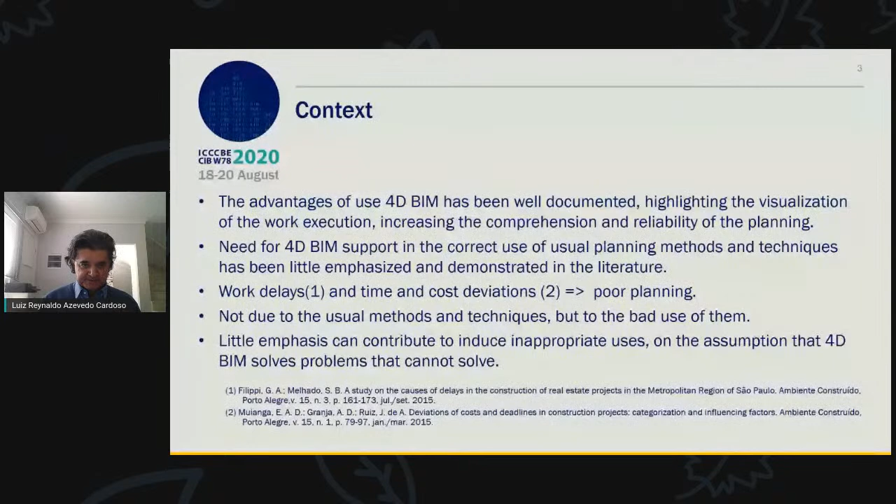Objectives. Propose and demonstrate the viability of a method to use 4D BIM to support strategic construction planning decisions. Methods: literature review, conceptual considerations, and the presentation of a case study. Literature review: databases Web of Science and Scopus, sample to analyze the content, 22 articles.

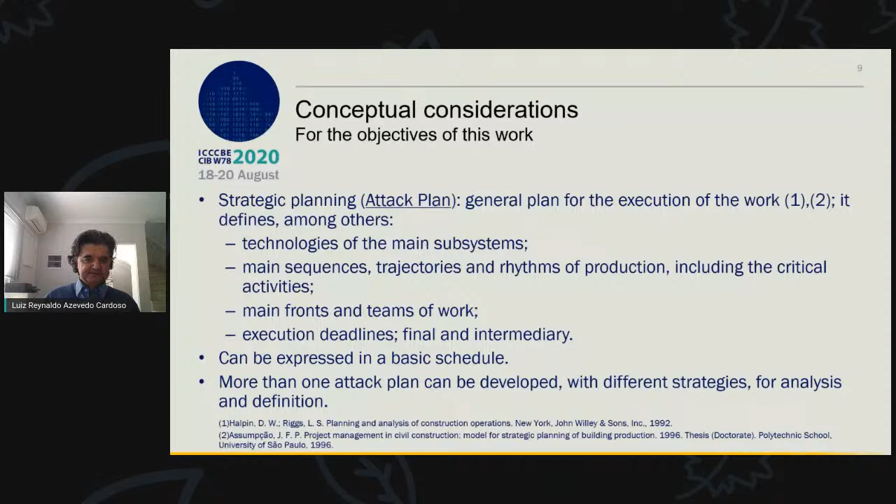Strategic planning is general planning for the execution of the work. It can be expressed in a basic schedule. More than one attack plan can be developed for analysis and definition. The planning techniques considered are Gantt chart, PERT/CPM, precedence networks, and line of balance.

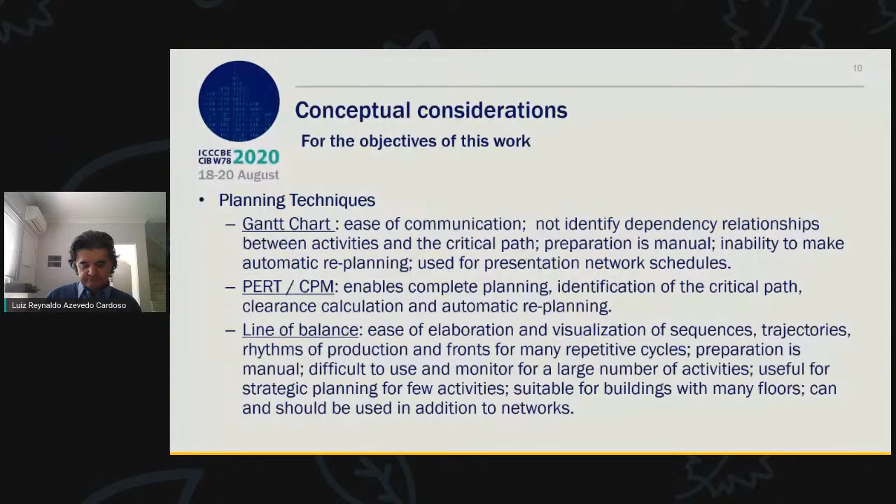The planning techniques have been able to support planning needs. Its main limitation is the difficulty of interpreting the schedules. 4D BIM allows visualization of the building construction. 4D BIM doesn't replace the usual techniques; it should be connected with them. It is necessary modeling from the 2D CAD and complementary elements and equipment. In the strategic planning, it's possible to model only critical sequence with simplified modeling, and the planner can do it.

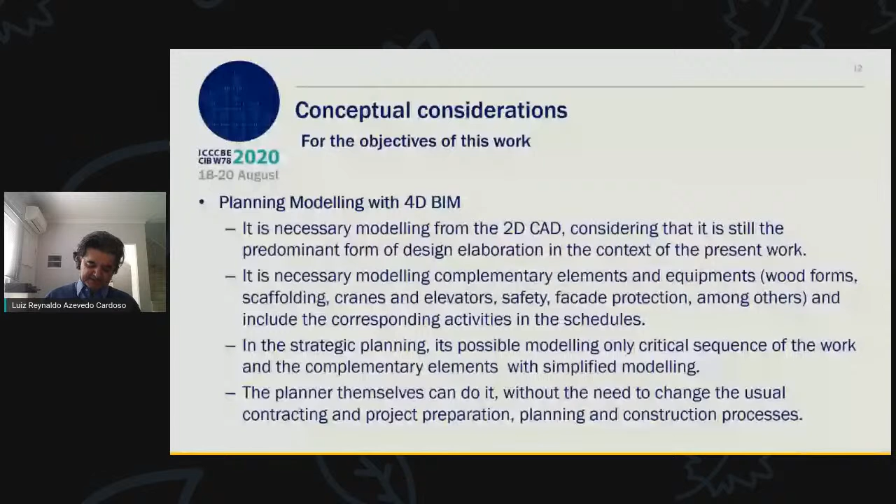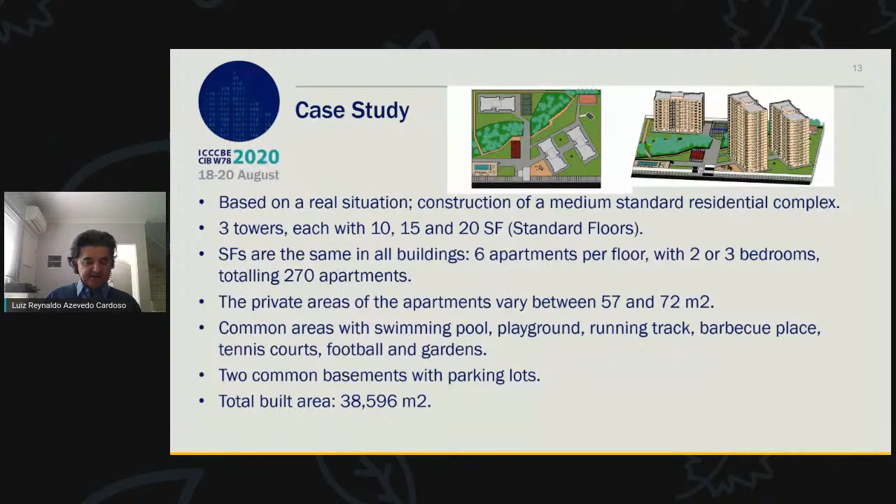Case study: construction of a medium standard residential complex, 3 towers with 10, 15, and 20 standard floors, 270 apartments, built area about 39,000 square meters. The 3 towers will be built simultaneously with a gap of 30 days. The question is, which tower to start with, the biggest or the smallest? Proposal: simulating the two alternatives in 4D BIM.

Modeling from 2D CAD in Revit with 3 towers, external ground, complementary elements. Simulation with Navisworks, with files imported from Revit and the schedules made in Project. Images of the visualizations. On the left, initial works. In the middle, plan 1, start by the largest. Plan 2, start by the smallest. And on the right, the complete work.

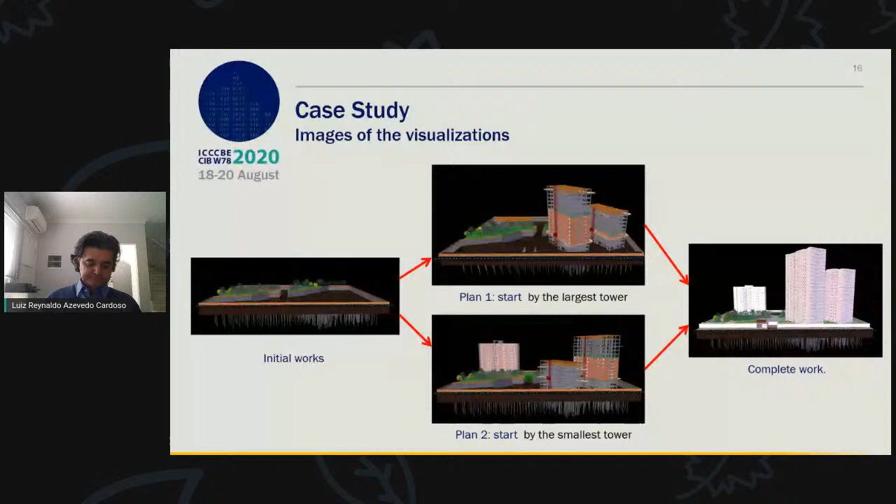Results and discussions. Plan 1, 22 months. Plan 2, 24 months. Visualization presents good general quality, providing decision support. The main difficulty is the modeling time, also reported in the literature review, increasing from about 150 to 600 activities each plan, all modeled. The total expenditure can be compatible.

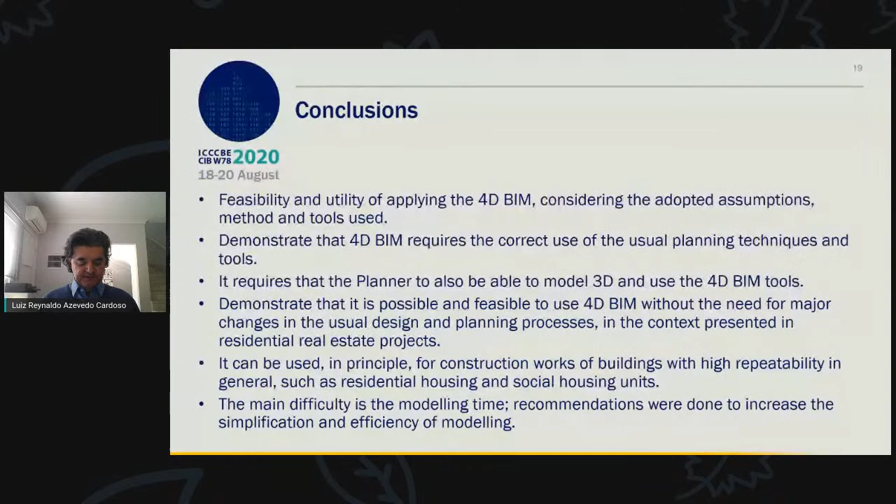Conclusions: feasibility of applying 4D BIM with the methods and tools used. 4D BIM requires the correct use of the usual planning techniques and tools. The planner should also be able to model 3D and use the 4D BIM tools. The main difficulty is the modeling time. Recommendations were made for this.

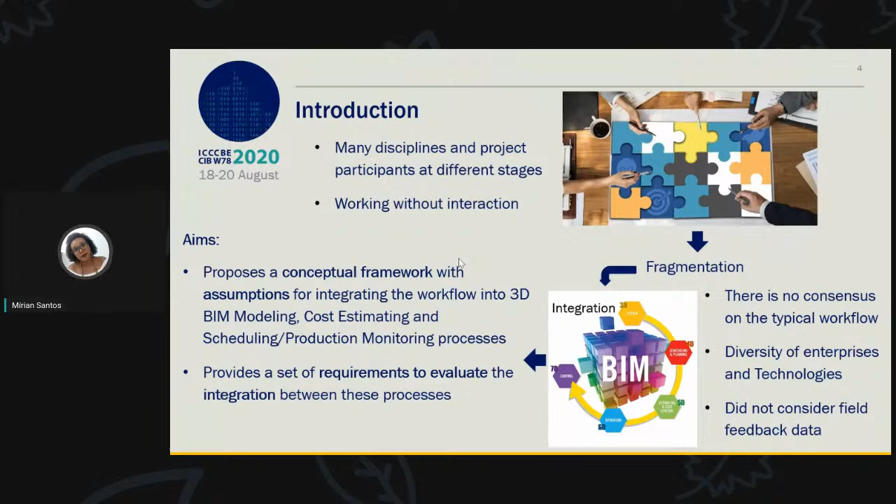Construction projects involve many people who usually work separately in different stages. For this, fragmentation represents a common problem. Many studies have emphasized the benefits of integration using BIM. However, there was no consensus on a typical workflow to integrate different processes in construction. This work proposed a conceptual framework with assumptions for integrating 3D BIM modeling, cost estimating, scheduling, and monitoring process workflow, and also provides some requirements to evaluate the integration between these.

With an integrated workflow, it's possible to share information and activity through people, processes, and technology, resulting in improvement in transparency, communication, collaboration, and coordination.

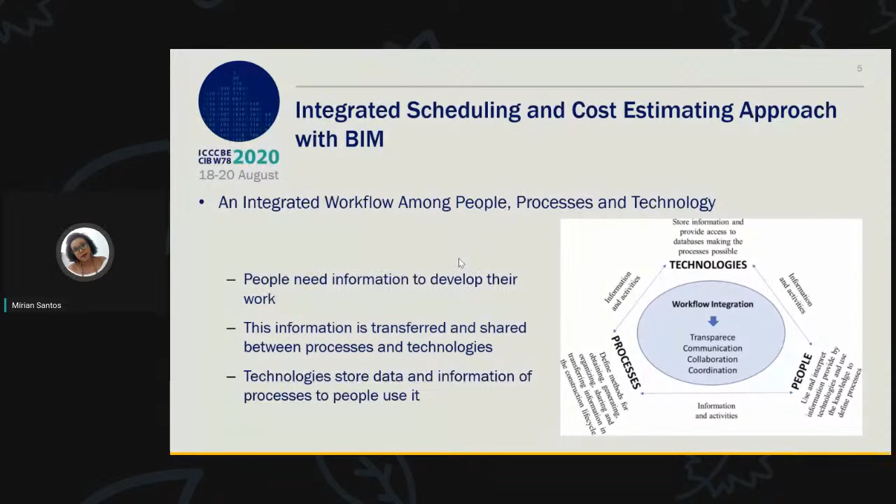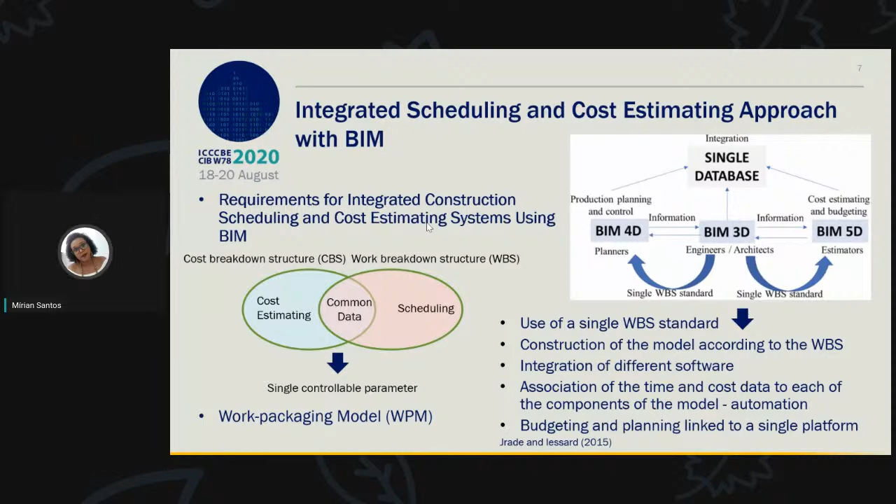Cost estimating and scheduling integration must be through a single controllable parameter, since they share some common data, as resources and quantities. The work packaging model facilitates the integration once it uses cost and scheduling in a single parameter, the WBS. Other requirements to foster integration with BIM are: develop 3D modeling according to WBS, integrate different software, link time and cost data to model components, always focus on automation, and use a single platform to link cost and planning information.

A case study took place in 2 projects. The company used the software Revit, Navisworks, Project, TOTVS, Excel, and CP Obras, a customized software. The study aimed to answer the following question: How is the workflow between BIM modeling, scheduling, cost estimating, and monitoring processes? What problems commonly hinder integration? There is also a literature review to understand how to improve and evaluate the effect of integration.

The main activities in project 1 were modeling, planning, cost estimate. The team received the 2D project in the office. The long-term plan is sent to field staff. Mid and short-term planning is integrated into monitoring software, and the real data is sent to the monthly report.

The difference from project 1 to project 2 was the use of a quantity take-off of BIM, and the sum adjustment and activity sequence uses some field data. But in project 2, there was no long-term planning and a defined work package.

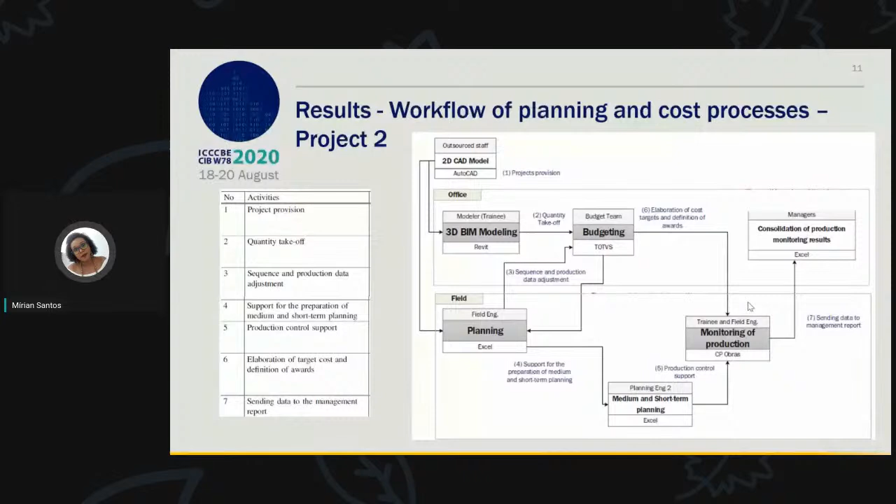The most common problems were: planning centralized in the office, lack of a work package based on field activity, no use of a single WBS standard, and a need for a single platform or tool to integrate all processes. Also, there is no integration with BIM modelers to develop a useful model, and the real costs and planning data were not integrated with BIM.

In the conceptual framework, the integration of processes must be one by one, encompassing people and technology. Then, the integration could be accomplished fully. In 3D BIM model cost estimate integration, one has to consider the number of 3D BIM elements and how the estimation program captures and uses this data. For schedule-monitor integration, you have to pay attention to how the work package will be organized and how production data will be collected in the field. In this way, feedback will be more agile.

In 3D BIM modeling, scheduling, monitor integration, you have to try to connect as closely as possible the BIM elements with the work package. Then it will be possible to use 4D simulation. For cost estimating, scheduling, monitor integration, it's necessary to take into account the work package and how cost data can impact the schedule and vice versa. In this way, it's more effective to control costs and deadlines.

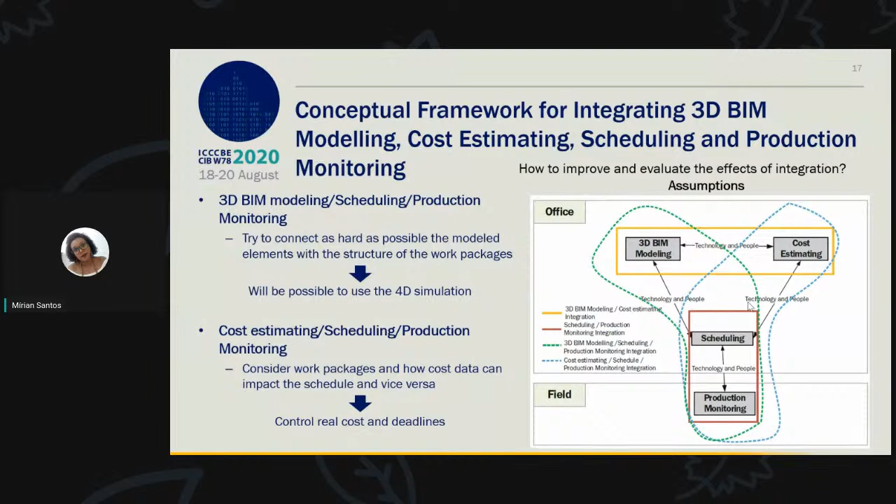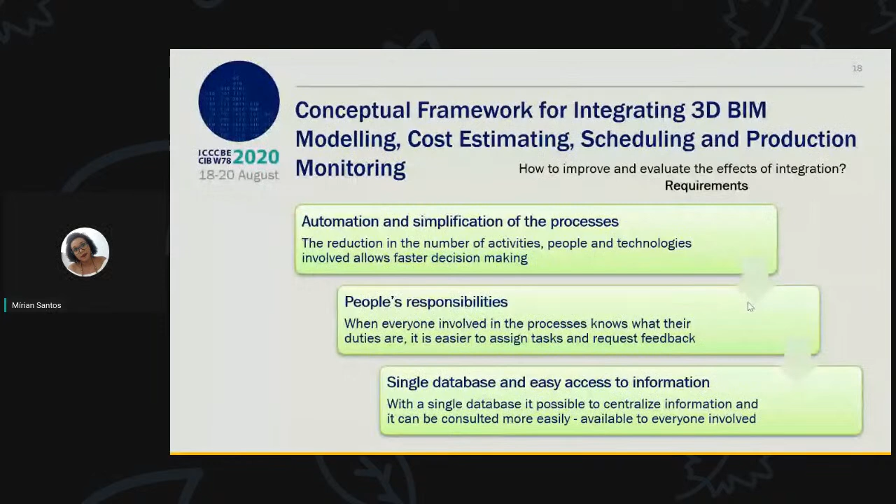Some requirements for integration are automation and simplification, necessary to reduce the number of activities, people, and technology involved. If you know people's responsibilities, it's easy to assign tasks and request quick feedback. A single database to centralize information and make it available to everyone is a great idea. Making sure there is communication between office and field teams, interoperability is important too, as well as reviewing and updating cost and schedule data.

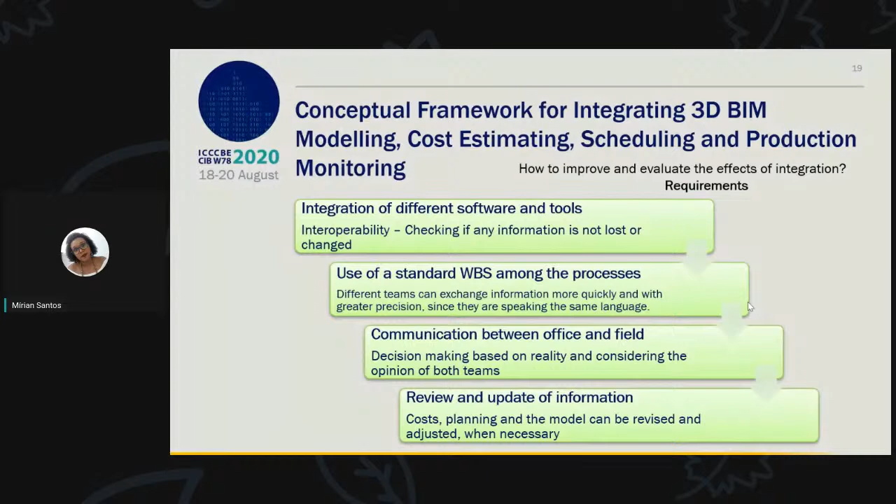Finally, based on the conceptual framework and the requirements, construction companies can carry out a diagnosis of integration, as well as evaluate if there are any improvements after implementing integration. Thank you all for your attention.

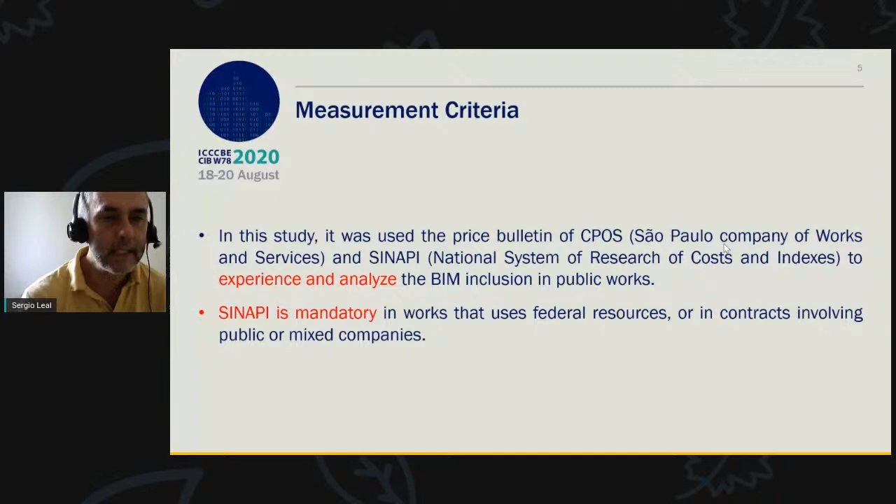It was found that simplification is highly desirable in propositions for the user with BIM. For example, SINAPI has 32 types of rough cast. This is a huge number, and this variability occurs due to the need of an application place definition in this criteria, which leads to variation in productivity, in remuneration, and in changes in application tools, and so on.

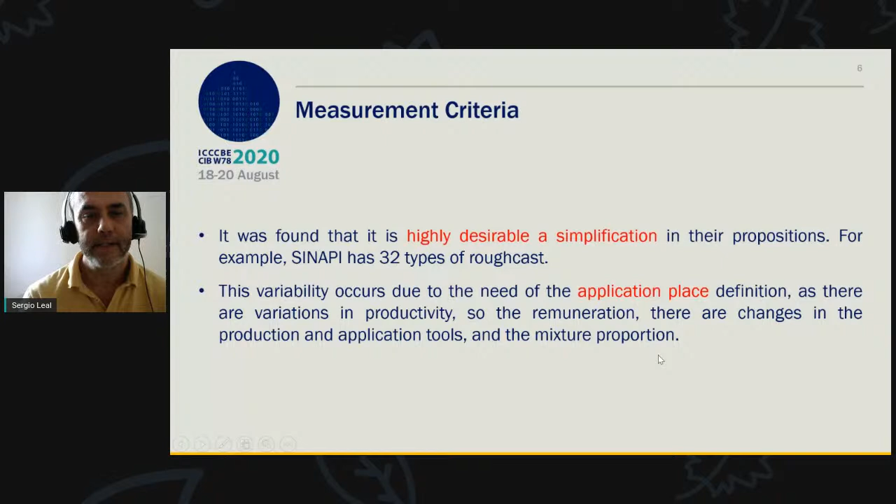Too many variables created great difficulty in BIM classification processes, and very small flexibility for the builder to make his propositions. Then we noted that if we only change a little bit the net of possible classifications.

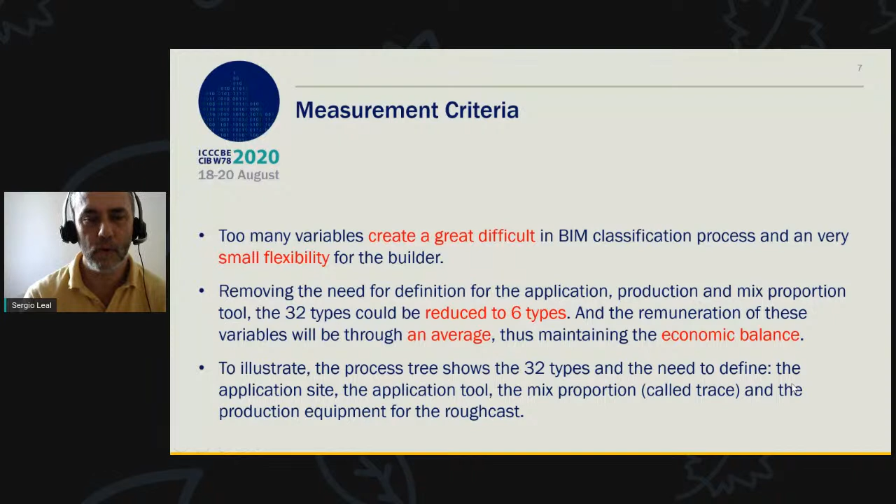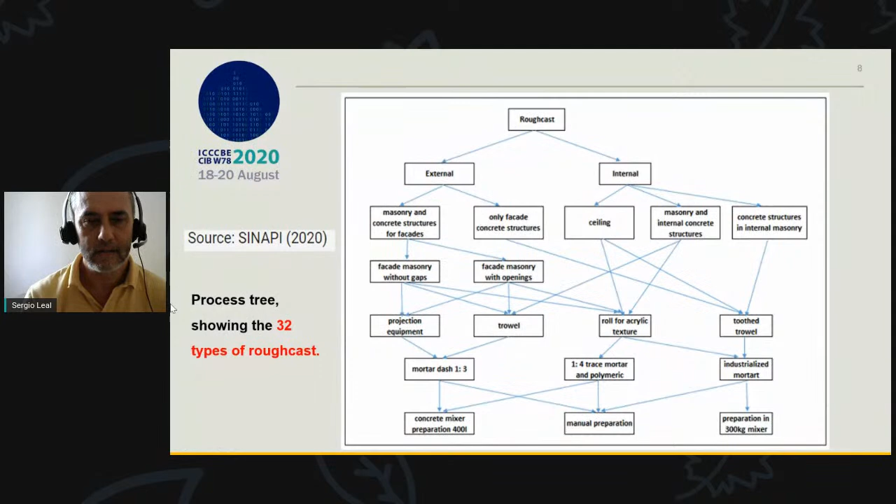Take rough cast, for example - this is the net, the process tree of the definitions of rough cast. If we take off the need for the definition of the place in the rough cast, we drop from 32 to 6 types of rough cast definition and classification. This is quite good, and quite necessary to do a job effectively, with productivity, in this kind of public work.

Here is the definition of the composition of these kinds of services in the public works here in Brazil, in SINAPI, and in this case the SINAPI proposition.

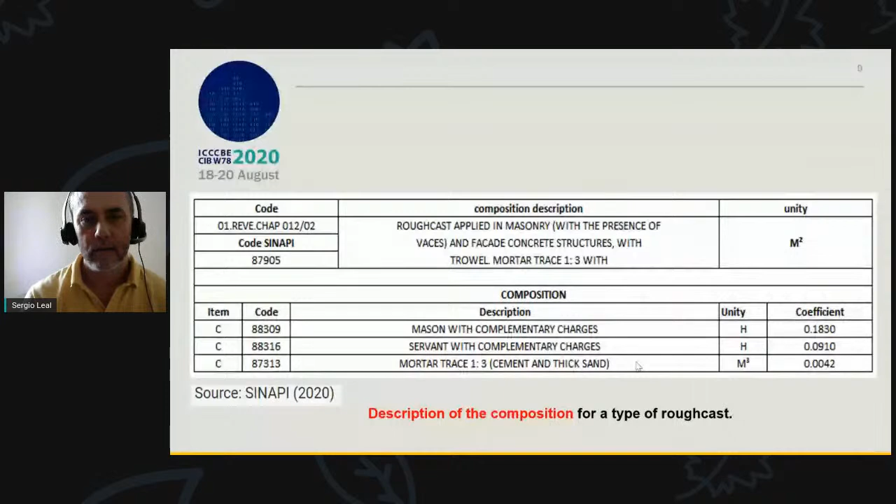This research was conducted with a design science research method that proposes to build a prescriptive artifact and to solve a real problem. Then we modeled an actual penitentiary project at the São Paulo State.

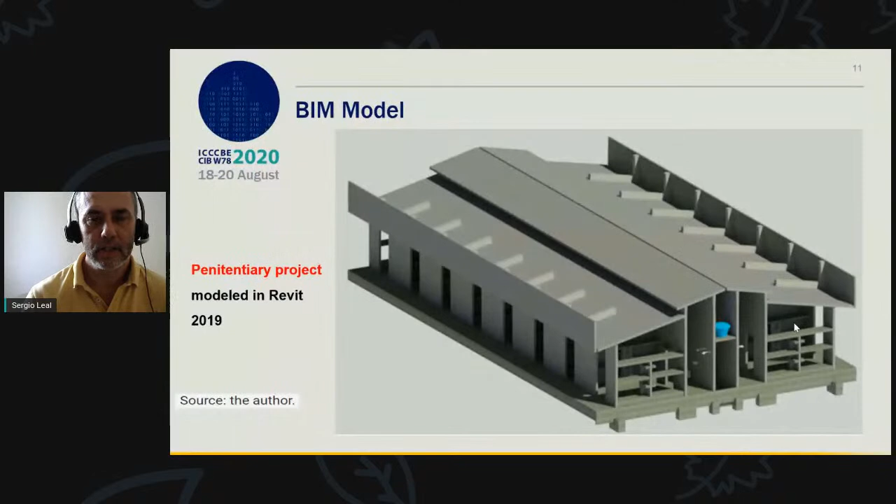This model was elaborated from the CAD to the information model, and is under construction now. This means the actual costs and service quantities will be used for the model consistency verification afterwards. This is a kind of construction that is very modular - here is the figure to illustrate the model. It's very modular and was applied in other constructions, so we have so much information about the execution of this kind of work.

A Revit classification manager was used, and we noted a limitation in the classification of composite objects. For example, with layers it's not possible to classify them separately, so we sought an alternative to overcome these difficulties.

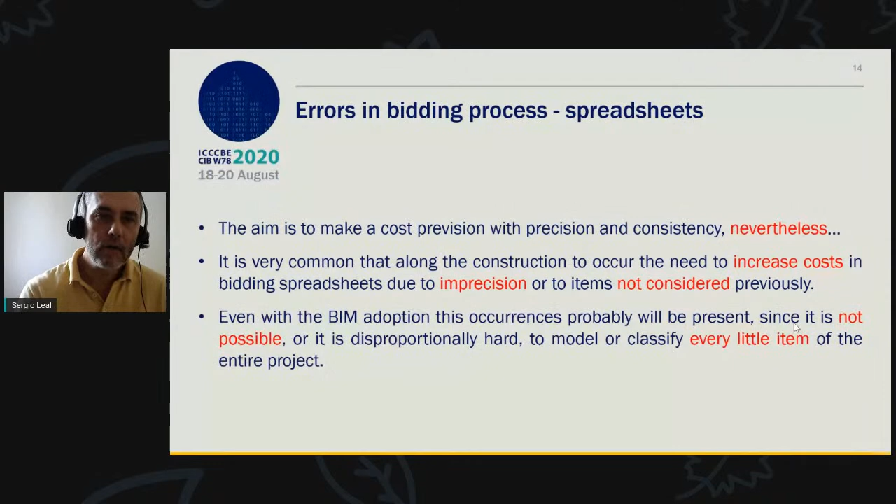The aim, at least, is to achieve the most precision and consistency in cost provision, but nevertheless it's very common along the construction for increases to occur, due to a number of issues. But in Brazil, there is no standard for inconsistency classification.

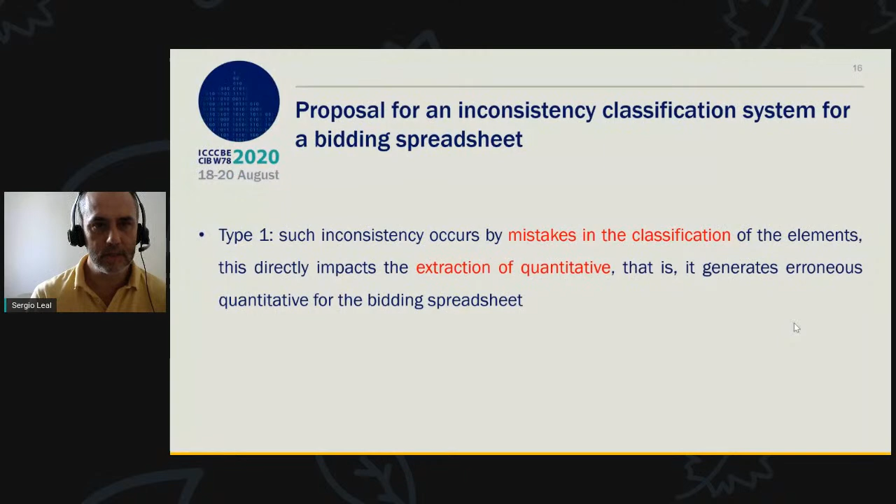It is an error - it was an error. It exists as an error classification, but we, as a byproduct of this research, intend to propose a classification of these inconsistencies, resumed in 4 types. Here is type 1 - I don't have time to explain, but type 2 is the lack of interpretation, which leads to an inclusion of additional services, causing what we call double remuneration.

Type 3 is an inconsistency that occurs through a global analysis of the bidding, where we cross some information and conclude that it generates a need for a non-applicable execution process.

And type 4 is due to a lack of further information. The budgeter has the description of the services, and when the description is not quite good, he tends to choose the minor price, and this is not really good.

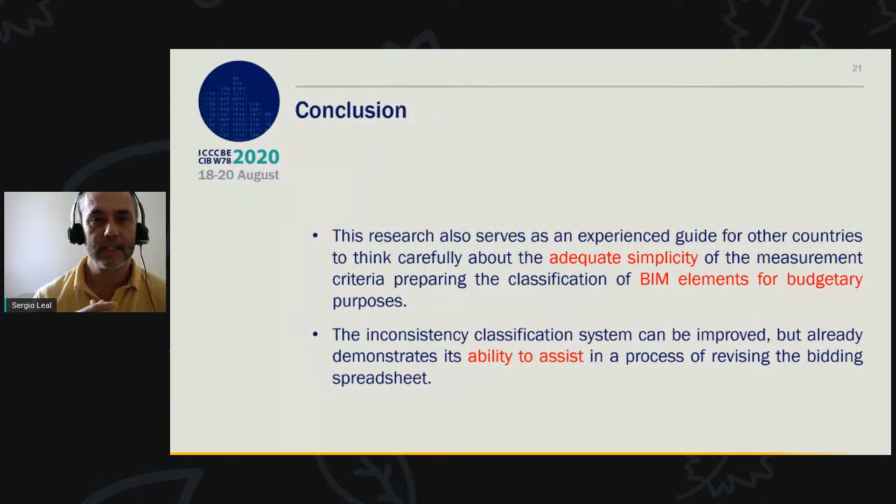We observed the possible advantages of simplifications in lots of services, and this research also shows that we can give you an experience guide of adequate simplicity and the classification of elements for budgetary purposes in public works, and the ability of analyzing the bidding spreadsheet with these classifications. Thank you very much, and sorry for the rush.

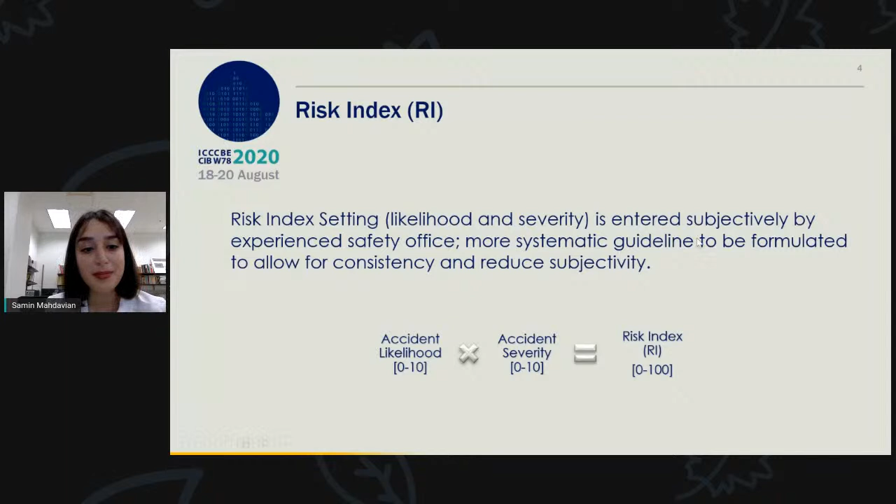The risk index is the multiplication of accident severity and likelihood. The likelihood and severity vary from 0 to 10, 0 the lowest and 10 the highest. These numbers are entered subjectively by an experienced safety officer. The higher the RI score, the higher the accident risk. You can see the formula on this slide.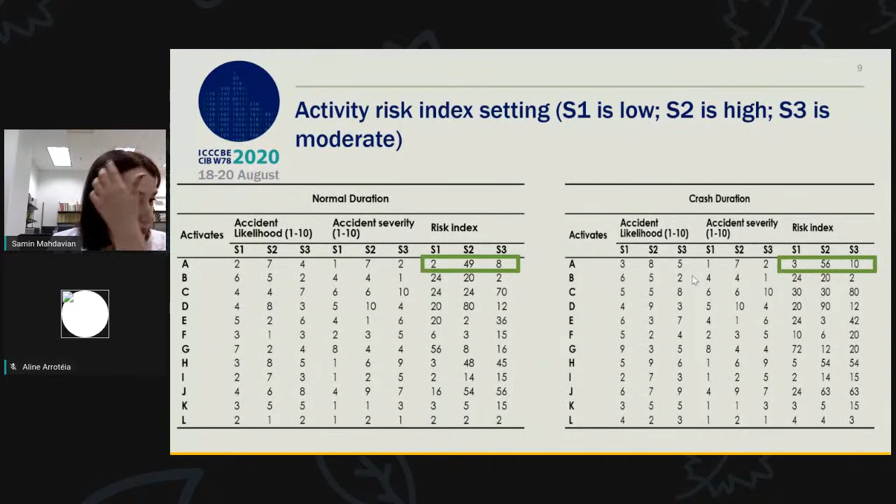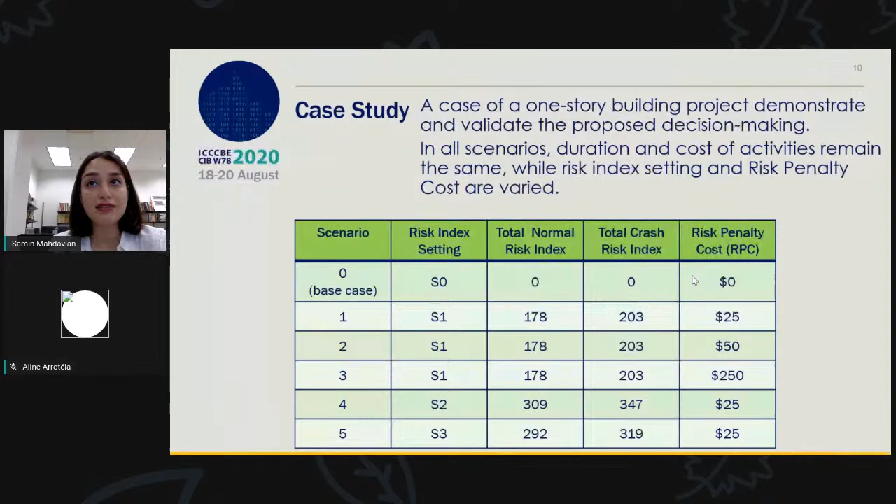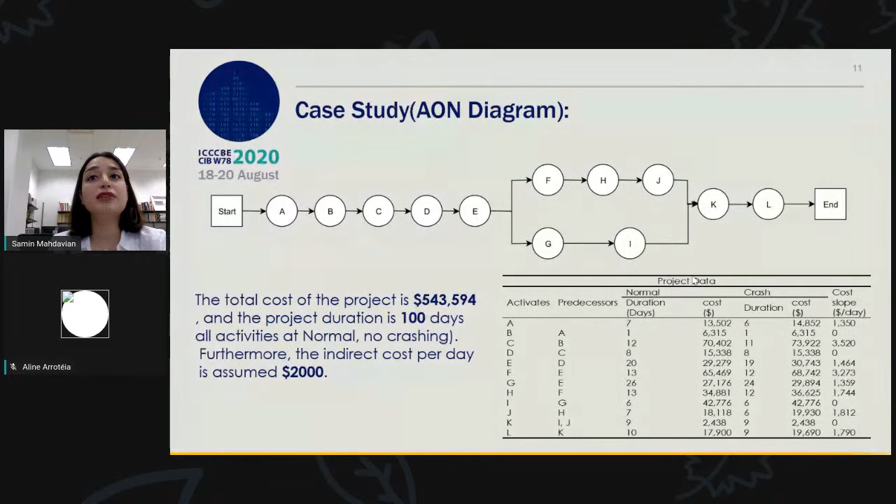A case study of a 1-story building project demonstrates and validates the proposed decision-making. In all scenarios, duration and cost of the activities remain the same, while the risk index setting and risk penalty costs are varied. You can see all 6 scenarios in this table. The AON of the case study is presented in this slide, and the total cost of the project is $543,000, with a project duration of 100 days. All activities are normal in this table, and the indirect cost is $2,000 per day.

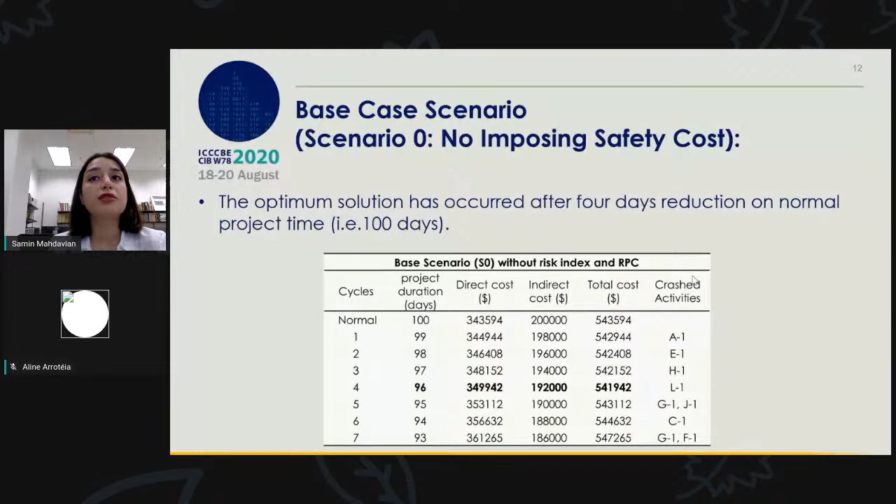The base case scenario is presented in this table with 0 risk index and no imposing safety cost. The normal project time, as mentioned before, is 100 days, and the optimum solution has occurred after a 4-day reduction. It means the optimum solution is for 96 days.

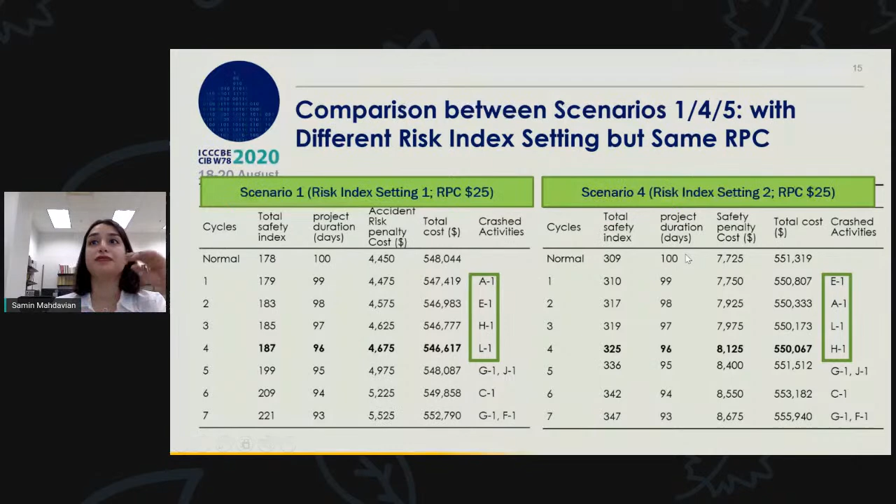Comparing the results of scenarios with different risk indexes and same RPC, which was $25 if you saw it, shows that sequence of crash activity has changed, but the total project time and cost has remained the same and it is not affected. You can see all the scenarios with the risk index and with the RPC together in this slide. And I want to show that the risk indexes affect the selection of crash activities and the final optimum solution of TCT.

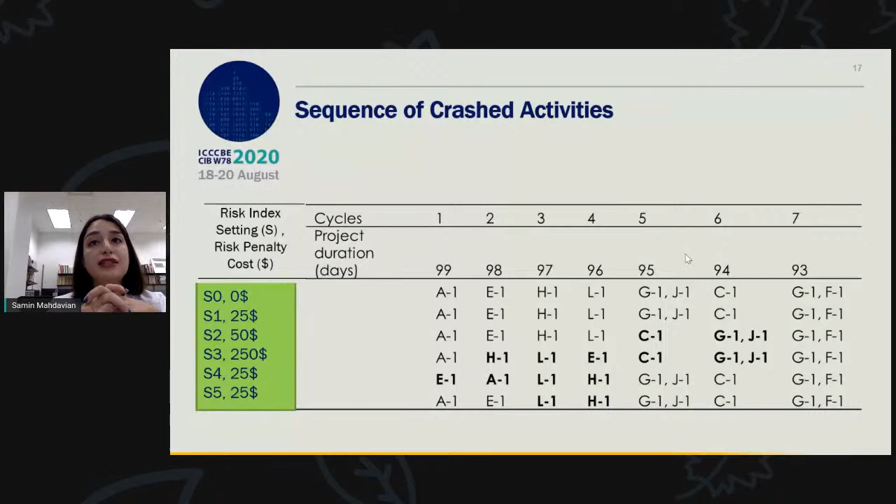There are two conclusions for this study. The first one is adding risk to TCT would impact the optimization outcome and sequence of crash activities. And the second one is with a proper risk assessment scheme and a proper risk penalty cost setting, accident risk can be incorporated into the TCT optimization.

And there are three limitations for this study. The first one is risk index setting is entered subjectively by safety officer and it is not formulated. RPC setting is based on trial and error, no formal approach. And the third one is the optimization must be formulated, solved specifically for each particular project.

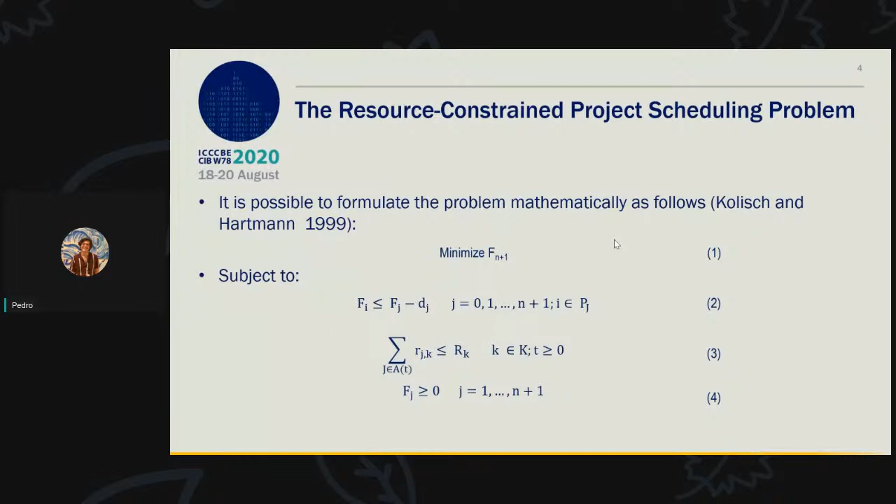The genetic algorithms are a class of procedures inspired by the genetic evolutionary process, and it uses three main operators. The crossover operators are used to mix the genetic information of the individuals, the mutation operator acts as a way to increase diversity in the populations, and the selection operator controls the population's reproduction by selecting the fittest individuals.

The proposed approach is presented in three parts. The first is the problem modeling, where the following assumptions for programming are defined. The activities of the project are represented by an activity on node graph and are linked by finish-start relationships. All known information about the project is deterministic. Only one mode of execution is considered.

All activities of the project are considered repetitive. The production rate of the project is considered constant, no preemption is permitted, and there's a resource limitation to be taken into account throughout the whole duration of the project. Can go.

According to the assumptions presented, the logical structure of the type of project addressed is obtained by means of an oriented graph, where the nodes correspond to the activities and the arcs represent the interrelationships between them. However, this representation is not the most appropriate when scheduling repetitive projects.

Therefore, the study implements the method presented by Ishihara, where the oriented graph technique is used to model the relationships between activities of a single housing unit, and then the line of balance method is applied to determine the time of completion of all housing units. Next.

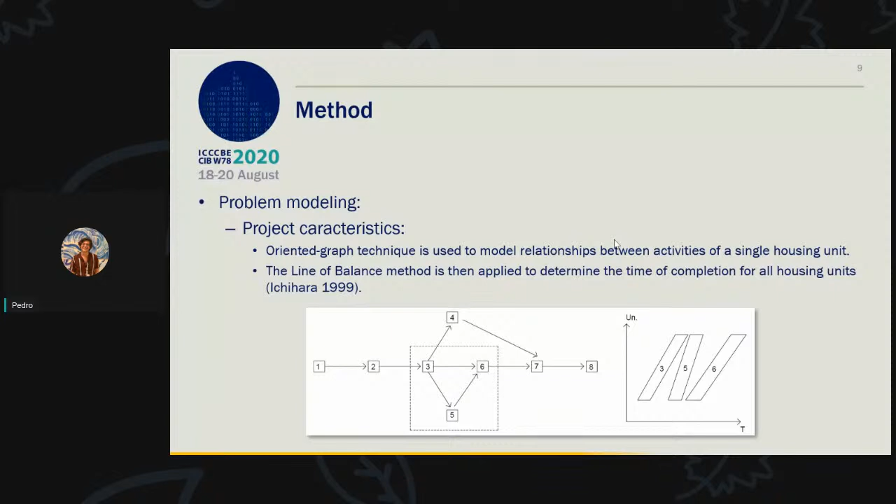The second part of the presented approach is the optimization model, where the genetic algorithm is implemented and its parameters are defined. For the population encoding, the individuals are represented by a list of activities. The assessment of the fitness of individuals is made by an adaptation of the serial method presented by Kolisch and Hartmann, considering the line of balance method. For the selection of individuals, the elitism and tournament operators were chosen. And finally, the one-point operator is used for crossover, and the inversion operator is adopted in the mutation phase.

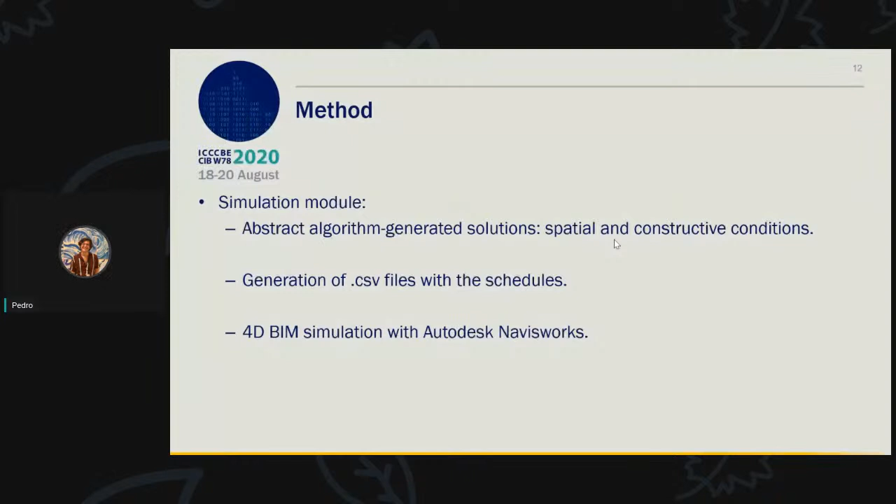The final part of the method proposed is the simulation module. This step is important because solutions determined by the algorithm are abstract and don't take into account spatial and constructive conditions. Therefore, the algorithm-generated schedules are extracted to CSV files, which can be directly imported to Autodesk Navisworks to perform 4D simulations.

To test the efficiency of the algorithm, 45 instances from the PSPLIB were randomly chosen, and 10 rounds of tests were performed for each. It was observed with the experiments that the algorithm is capable of generating better solutions over the generations. However, as the size of the project increases, so does the difficulty of finding good solutions and the required computational time.

3 groups of 3 instances were also chosen to verify the behavior of the algorithm until the last generation, in order to evaluate both its efficiency and the ability to improve solutions. For all of the instances, it was possible to observe the ability of the algorithm to create better solutions, which is mainly due to the choice of the selection by elitism that prevents the best solutions found from being discarded.

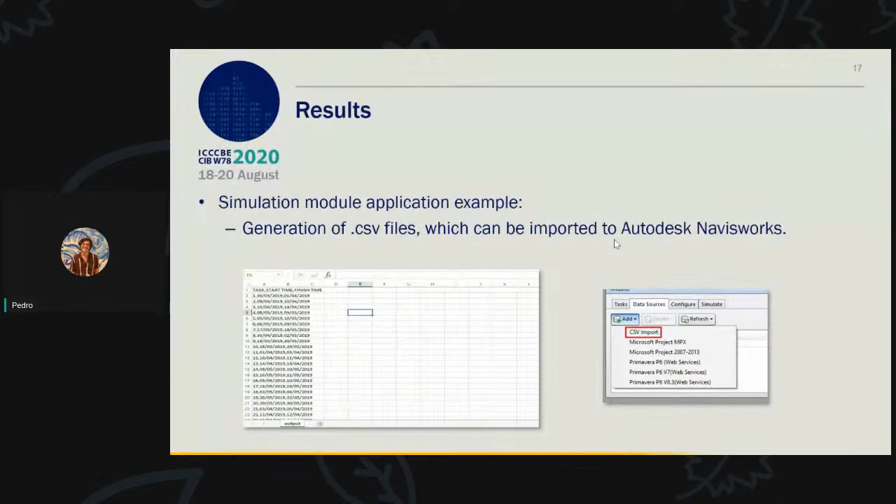And the final simulation could show that the generated schedule respects the precedence relations between the activities and also demonstrates that the line of balance logic was well implemented in the schedule.

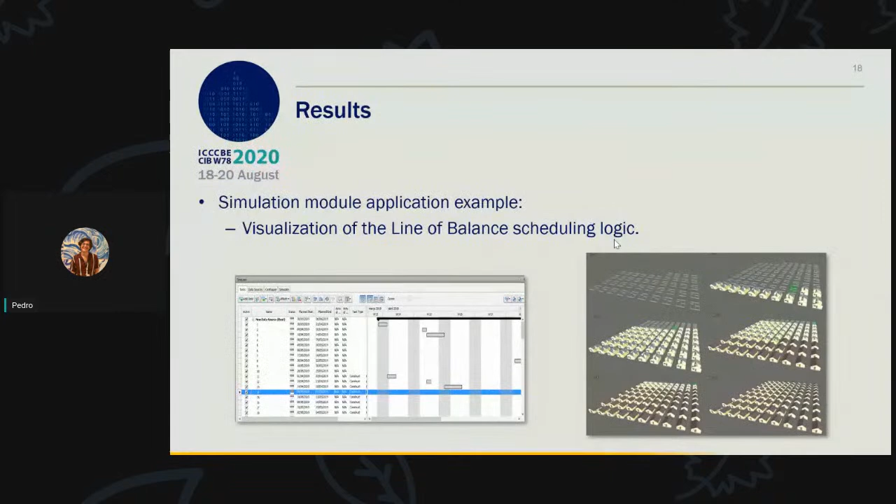Well, in conclusion, the experiments performed showed that the system created is relevant mainly as a way of reducing the human effort when scheduling repetitive projects, since in a few seconds it is possible to obtain a schedule that considers both work continuity and resource limitations. Simulation comes here as another tool to assist in decision making, since several possibilities generated by the algorithm can be tested and even modified through the thousands of functionalities in the BIM-based construction management software. The system can, however, still be improved, since for projects with large numbers of activities, the computational effort required was still very high.

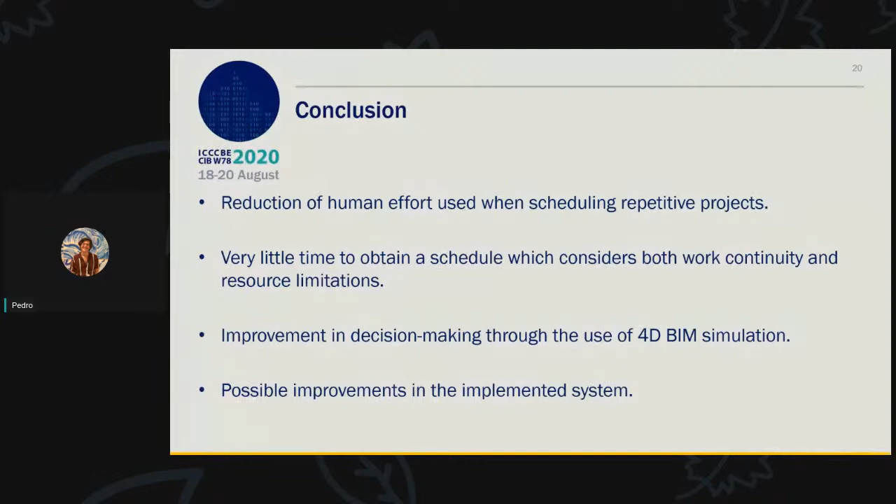Thank you. So with these 5 papers, we start the first question and answer slot. So we have a question, let me see, that is from Christina. Just a moment, I'm fighting the platform. Yeah, this one. This is to Miriam.

Miriam, did the authors test the proposed framework in a case study? Okay. We used the conceptual framework to devise a method to integrate 3D BIM modeling, cost estimating, scheduling, and also monitoring in a case study. It was a product of my master's degree. In this case study, we practiced two assumptions: the 3D BIM modeling and cost estimate integration, and the scheduling and monitoring integration. And there are improvements in implementation and mostly the definition of the work package, resulting in fewer changes in the field.

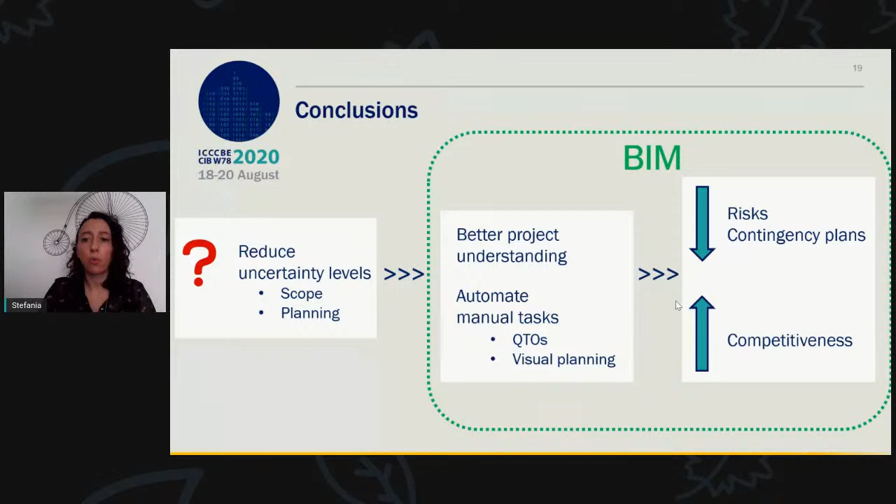During tendering activities, the use of BIM can help reduce uncertainties regarding the project scope and its planning by giving participants a better understanding of the process and automating manual tasks like quantity takeoffs, and promoting a more visual planning process. By consequence, risks and contingency plans are reduced, and the bid, therefore, is more competitive.

The main obstacles to BIM adoption during tendering phases include interoperability issues and a lack of standards. Culture should not be ignored once responsibility has to be shared between team members and stakeholders. Developing research on BIM adoption during the bidding stages is also encouraged to reduce this gap, especially on infrastructure projects.

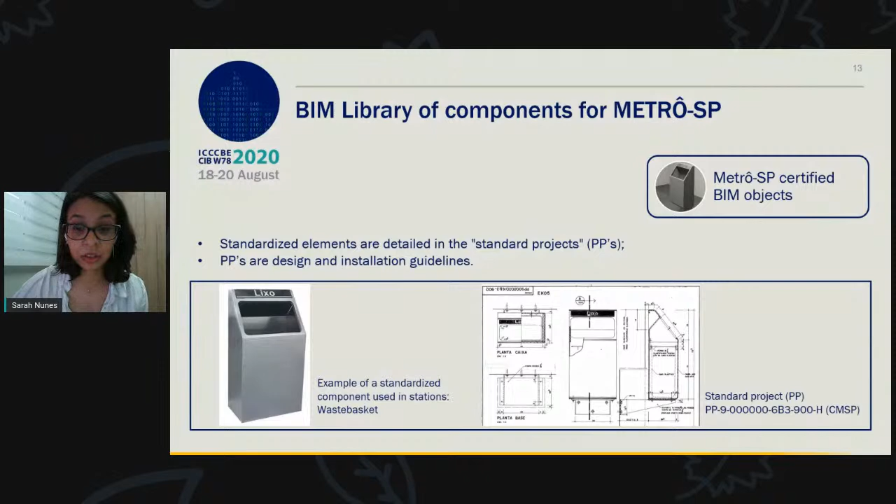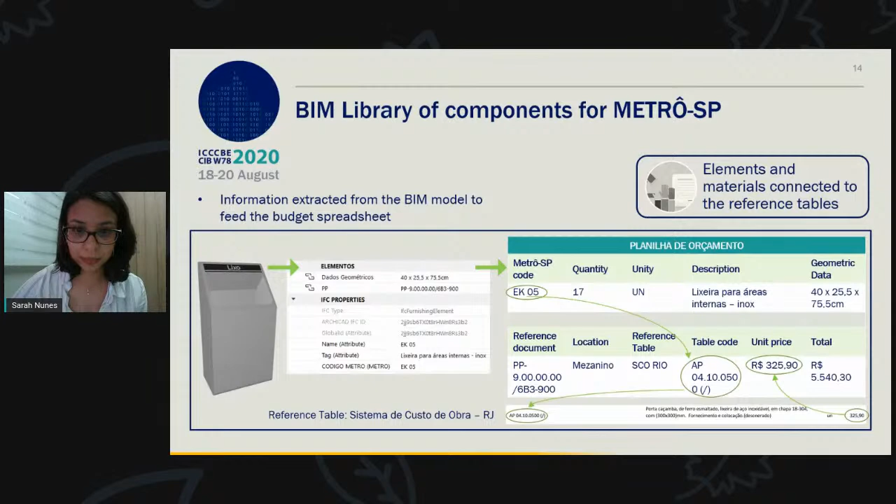In order to streamline and increase the quality of the budgets, all the elements, materials, and objects of the meta component will be related to spreadsheets. The proposed meta component must have parameters that make these predefined models fit in different projects. The study raised several parameters, such as the construction method, the demand estimates, and the depth of the station.

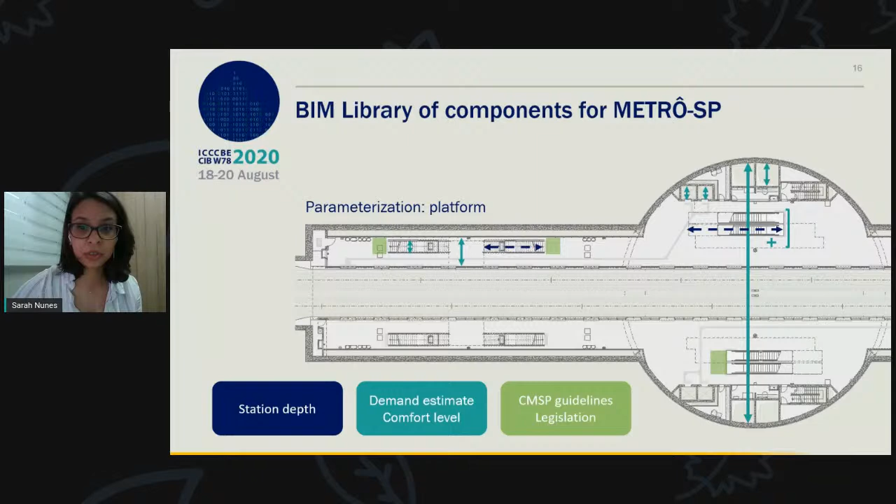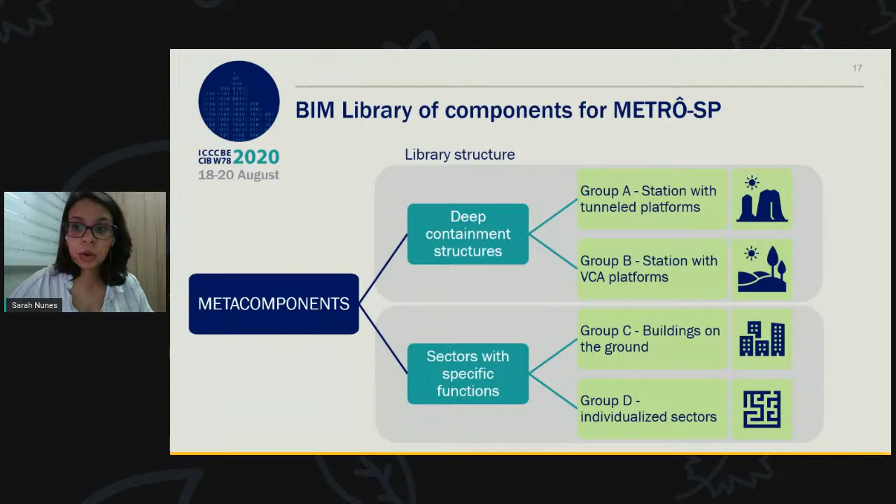From the start of the standardization of stations, it was possible to structure the component library according to the construction method or the function of the spaces. The group of deep containment structures contains the meta component with the deepest underground part of the station. Shallow containment structures often need adjustment according to the local urban layout, so they aren't part of the meta component.

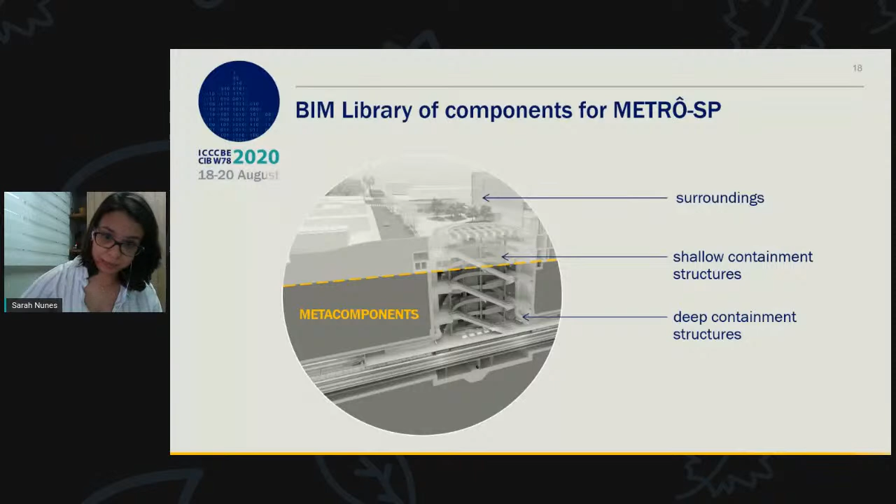The first meta component developed belongs to group A. From this development, the parameters and rules for this type of station were established. This first model has already shown some challenges, such as the parameterization of the components according to the rules raised, and the relationship of the items with the reference tables.

The library validation step will be performed shortly. It is expected to prove that the organization of standard projects in a parametric BIM library brings benefits, as it will optimize project development and increase the quality and transparency of the bidding process.

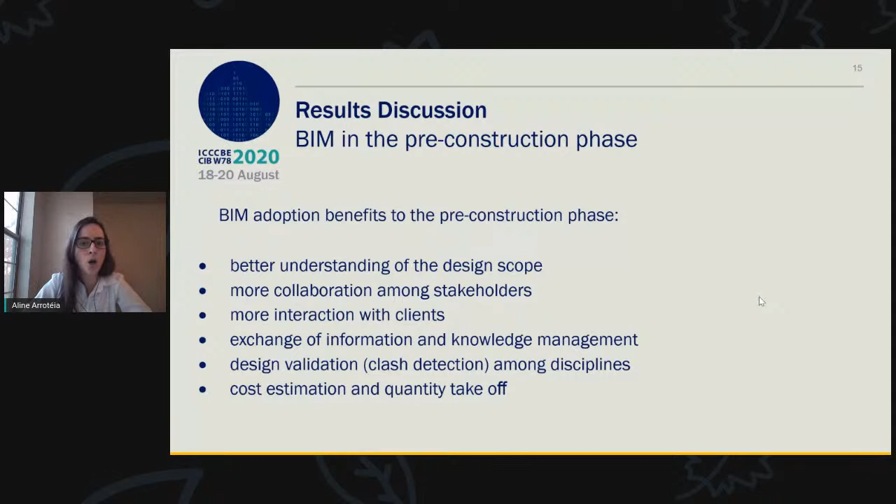Also, participants affirm that BIM has improved the design and construction interface by enhancing site layout, planning, safety, and reducing claims and risks. Findings also have shown a decrease in project fragmentation by promoting a better information management.

The main obstacles with BIM implementation faced by the company were the achievement of a desired LOD, players' collaboration in the exchanging of information, lack of communication among stakeholders, lack of collaboration between design disciplines, lack of knowledge of the design team concerning the construction demands, being lack of knowledge on the behalf of the outsourced design company, lack of interoperability between software, and the elevated cost of investment in software and hardware.

Based on our research goal, we understood that the main barriers with BIM are related more to managerial problems than with BIM itself. We know that BIM implementation is an ongoing process in the company, and due to the short period of time of BIM adoption, these results were plausible and even expected.

The construction industry is a complex and fragmented environment. In Brazil, the reality is not different. Not only the lack of trained professionals with BIM skill is faced by the Brazilian construction industry, but also there is a lack of knowledge concerning the project and process management.

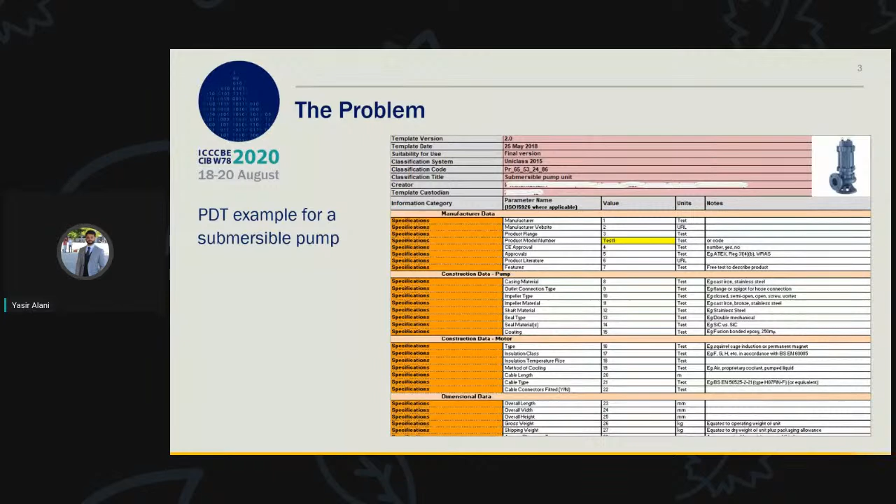So one of the solutions proposed by some industry practitioners in the UK and adopted by several companies is the product data templates. And as you can see here, this is an example of a submersible pump template. And there's some consensus on these PDTs in the UK. But the supplier is required to manually populate these PDTs and submit them to the company. So as you might imagine, there's quite a lot of manual work involved in the process.

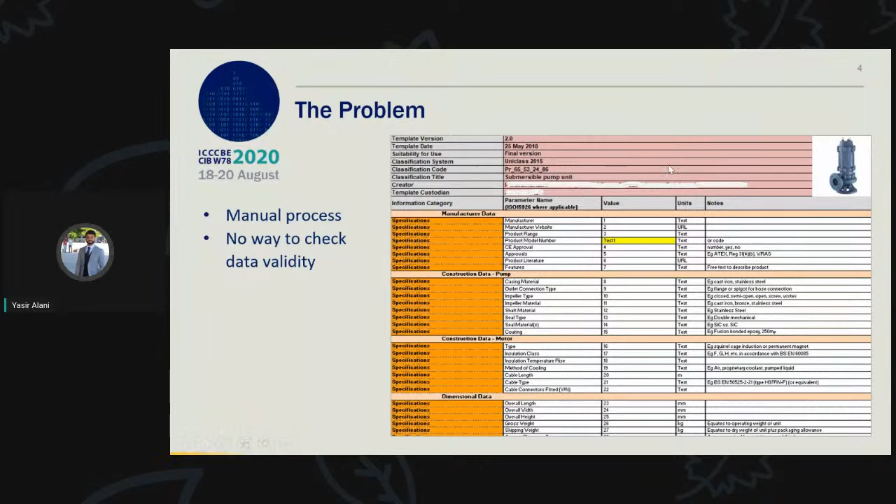So we're looking at a way to combine these PDTs into a unified model, which would make things easier. And that's when we started looking at semantic web technologies. And so the methodology was following a whole life cycle of information flow, which is basically the steady and continuous evolution and use of BIM information from the design all the way to decommissioning. And it basically consists of a set of guidelines to tackle such tasks.

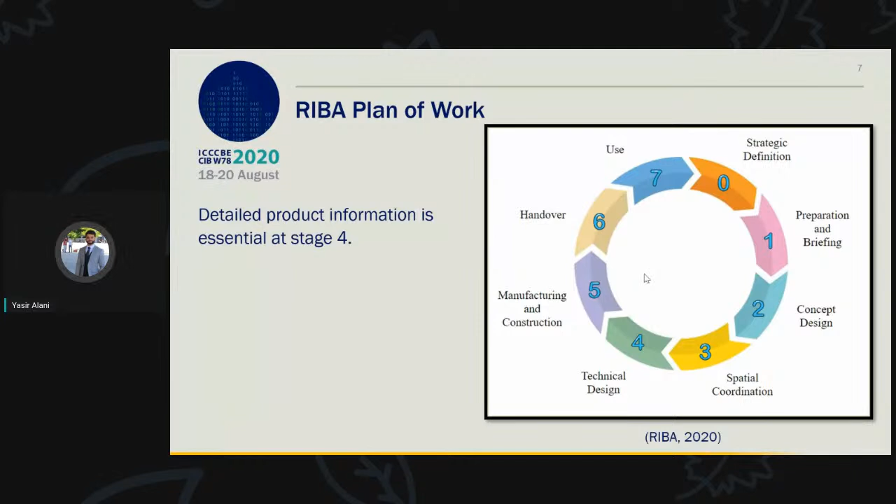Also, we focused on the RIBA Plan of Work, which is a document produced by the Royal Institute of British Architects as a guide to the life cycle of a project. It consists of 8 stages, and our model would aid project delivery mainly through stages 4 to 7, as you see on the picture here. So when the employer's information requirements are to be converted into detailed properties.

This is fine for logical inferencing, but the open world assumption assumes that information can be added at any time to the system, and so missing information is not treated as an error. So we used SHACL rules to close the world in certain places. SHACL is a Shapes Constraint Language.

So the ontology was deposited in a GraphDB knowledge base, which in its latest update supports SHACL rules, and so one can create the ontology for product data via SPARQL endpoint, as well as obtaining validation reports.

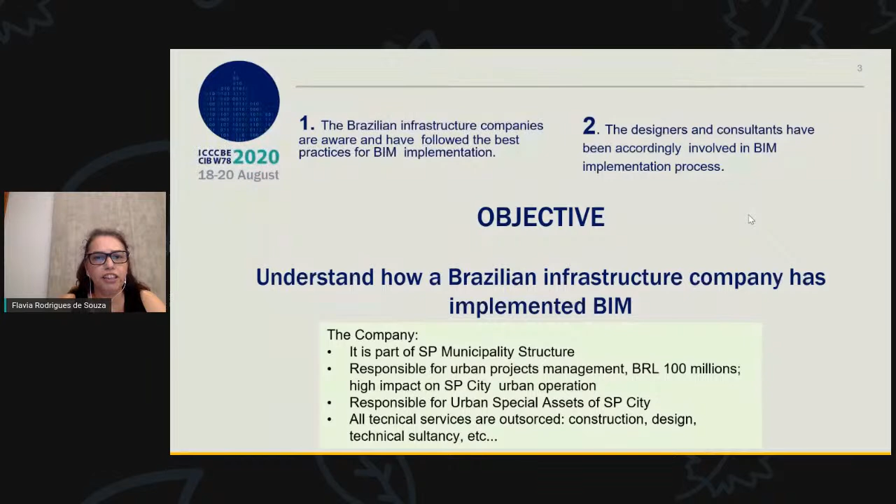The objective of my paper is to understand how a Brazilian infrastructure company has implemented BIM. It's a public company, part of São Paulo municipality, responsible for urban projects, medium and big projects, and responsible for urban special assets in São Paulo city, such as viaducts, bridges, and so on. All technical services are outsourced.

About methodology, we have two fronts of work. The first front of work is a case study done in the infrastructure company. The second front of work is a survey, which was applied with contractors and designers who work for the infrastructure company. The results of this study are recommendations for the studied company, and our references are the guidelines and best practices for BIM implementation around the world.

About the case study, the company started implementing a PMO in 2017. Among the PMO actions, there was a BIM laboratory. The first step of this PMO was to carry out a diagnosis. The diagnosis basically aims to diagnose the current practices of project management of the company and its nuances, and map the macro process of the company.

And they would like to answer the question, how can we support the company's operation, and what are the main issues of the company? Basically, about the diagnosis, the main issue of the company lives in the relation among scope, guiding process, and reference term.

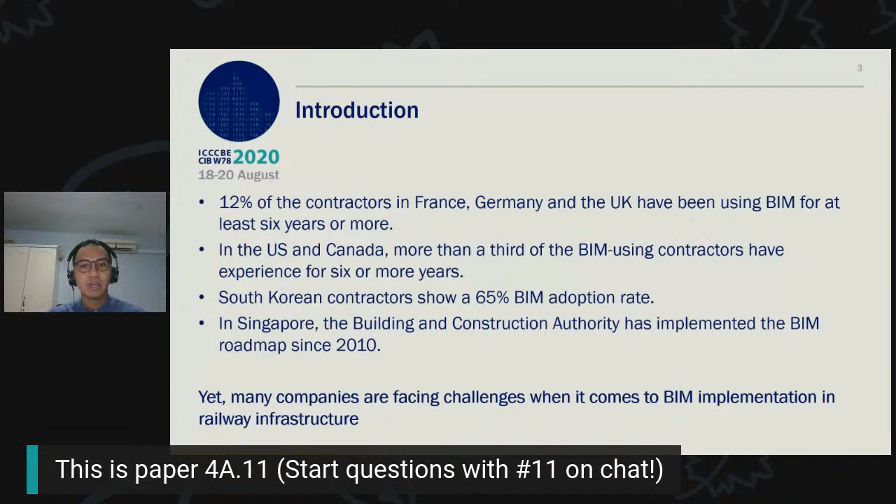For introductions, we reviewed the literature before conducting the survey, and here are some findings. 12% of contractors in France, Germany, and the UK have been using BIM for at least 6 years or more, as well as in the US and Canada. South Korean contractors show at least 65% BIM adoption. And in Singapore itself, the BCA authorities have implemented a BIM roadmap since 2010.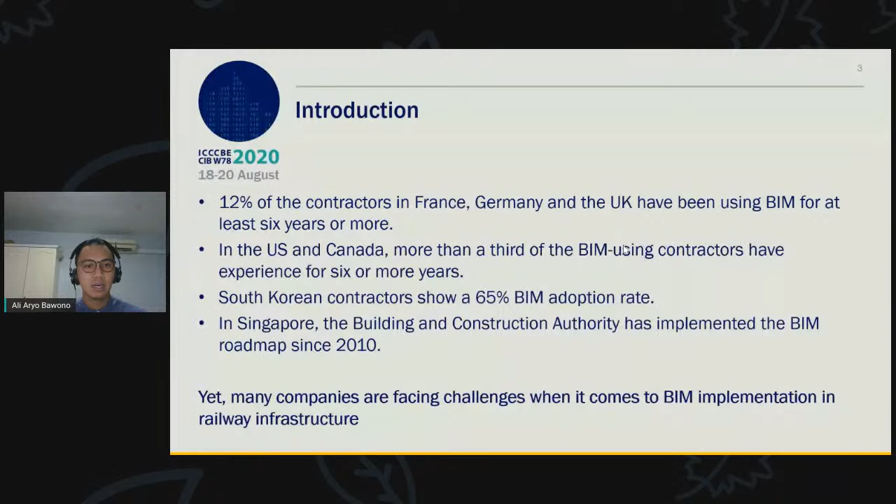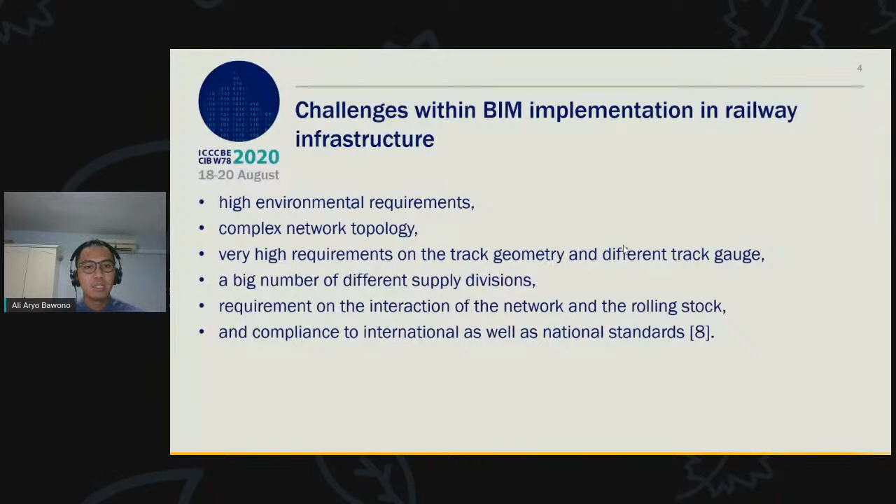But many companies face challenges when it comes to BIM implementation in railway. Here are some reasons, including high environmental requirements, complex network topology, very high requirements on track geometry, a big number of different supply divisions, and requirements on the interaction of the network and rolling stocks. So to understand BIM implementation better, we developed this study and its scope.

Here is the scope. We conducted a survey based on the semi-structured interview method, and made a questionnaire to understand the perspective of contractors or users of BIM. We try to address key challenges including technical, personal, and process aspects, and tried to get answers from the right people, including responsible managers and engineers.

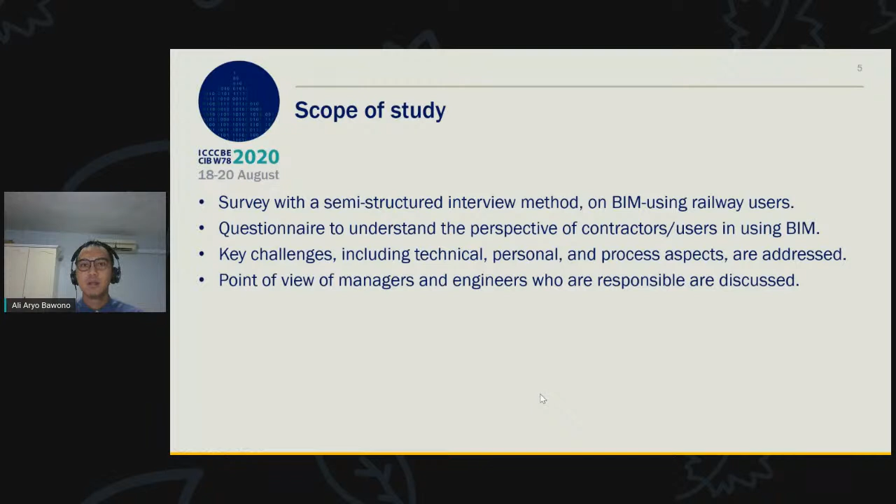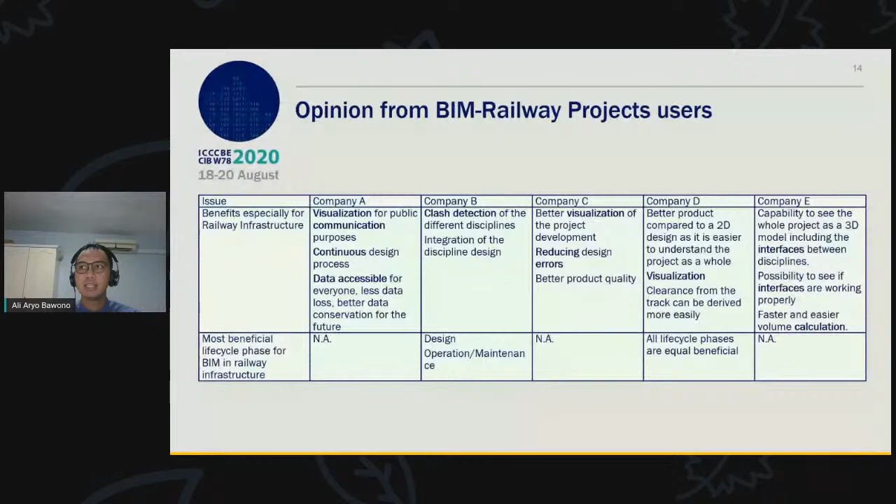Here are some benefits shared by the users. Most of the companies shared benefits including visualizations, easier communication, continuous design process, accessible data, early clash detection, reducing error, and also better interfaces.

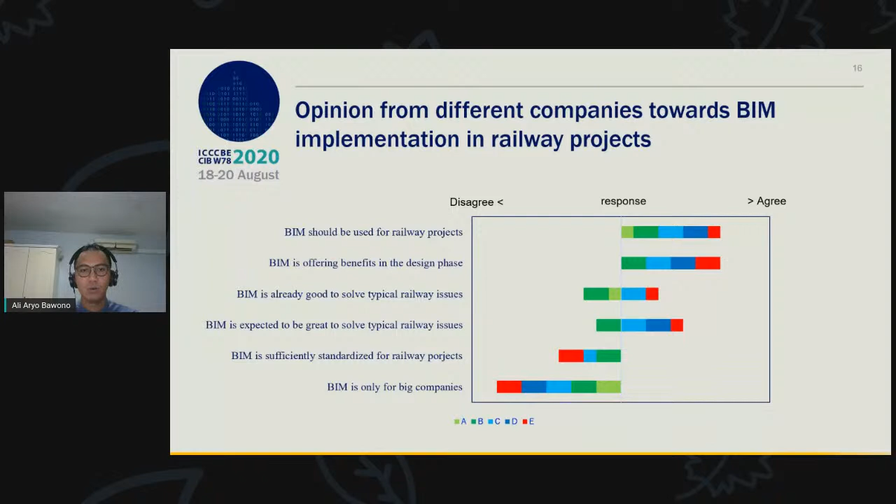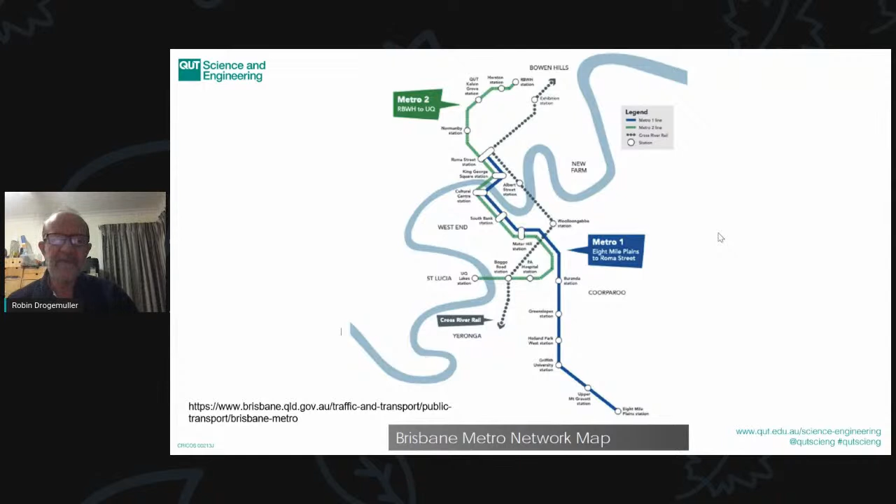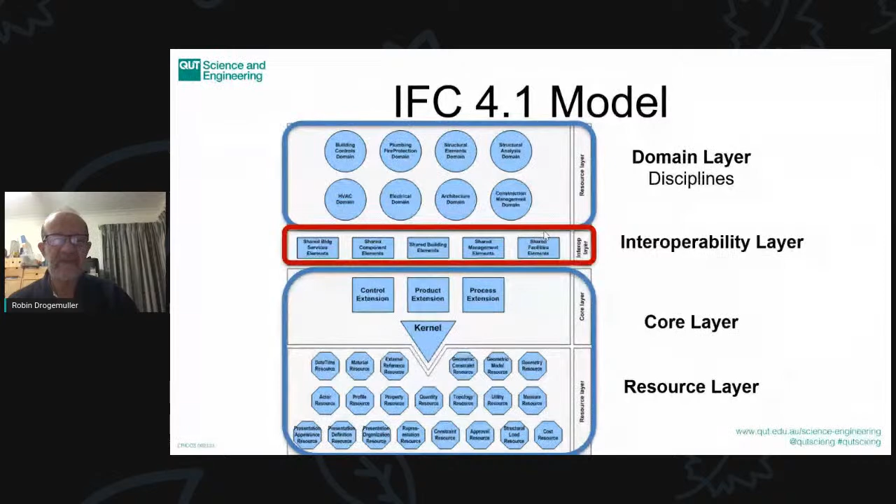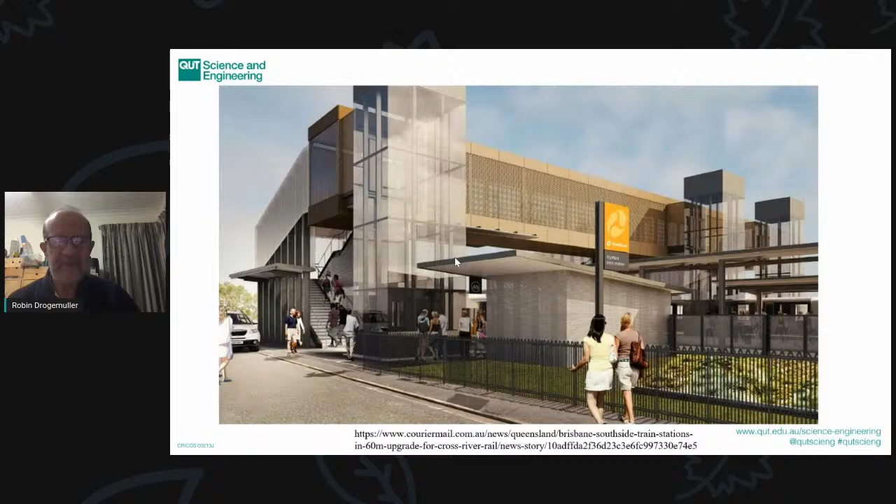And then they also meet buildings. So here's a new railway station being constructed for the Cross River Rail project. So we need to be able to integrate these infrastructure projects with building BIM as well. Next. So within buildingSMART, these are the current infrastructure projects running across the top. We've got rail, road, bridge, ports and waterways, and also the tunnel. Next. And then this is the common schema sitting underneath that needs to be defined from all these 5 existing working projects. Next.

So some preparatory work needed to be done. The original buildingSMART IFC model was originally aimed at buildings, where we were looking at the floors and so on. With infrastructure projects, they're more interested in alignment. So there was a lot of work done on defining alignments, initially just with road, bridge and tunnel modelling. Next. This was expanded to cover the other projects. So if you look at IFC Rail and the different systems they identified. Next. The ones that are specific to rail are sleepers, ballast and rails. Next. All the others are across a number of other infrastructure projects, and you can see tunnels are there. That's actually a completely separate infrastructure project. So you can see the interrelationships here. Next.

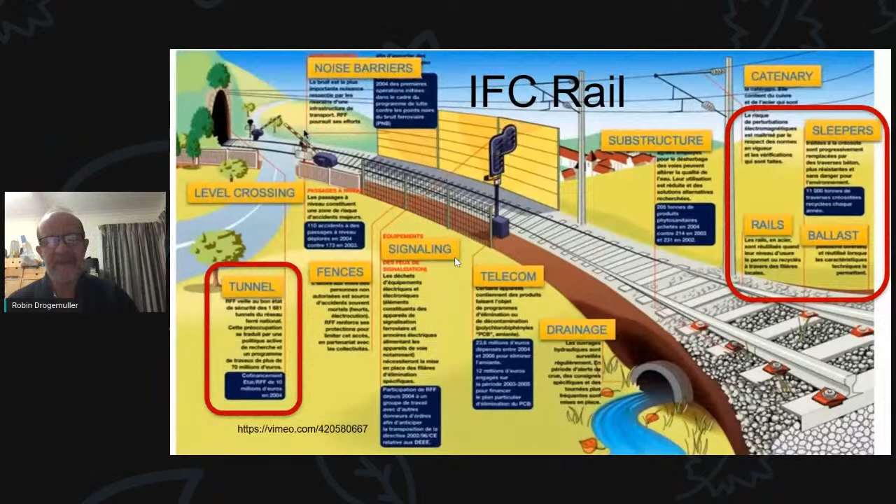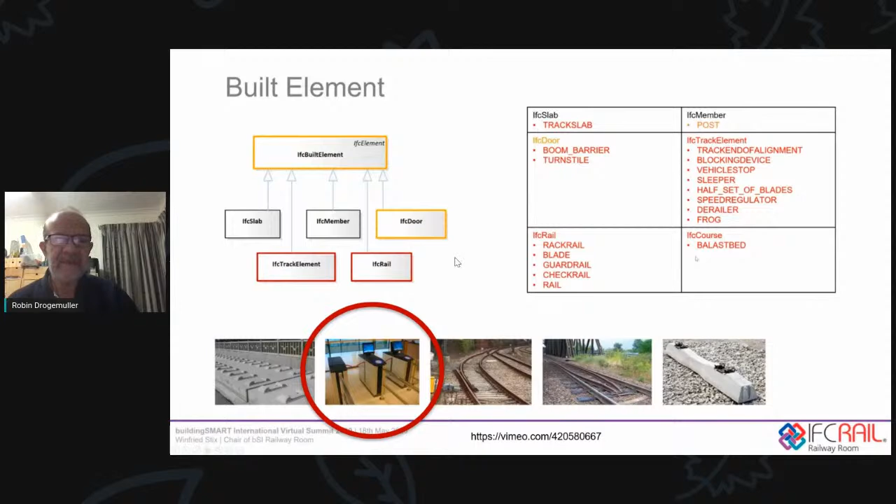Right. So in the process, they pull out some of the objects they're proposing. They're looking at a boom barrier and a turnstile being examples of IfcDoor from the existing model. Next. But turnstiles are used across a whole range of different facilities, so this isn't an object that's just going to stay within the rail project. Next. So if we look at the planning, next. The common schema there is all earthworks and geotechnical, which is going to be needed across the entire infrastructure project. Next. We also note that railway crossings and cityscape and the urban planning are out of scope. So this isn't actually going to cover everything. It's just a start in looking at roads and infrastructure in general. Next.

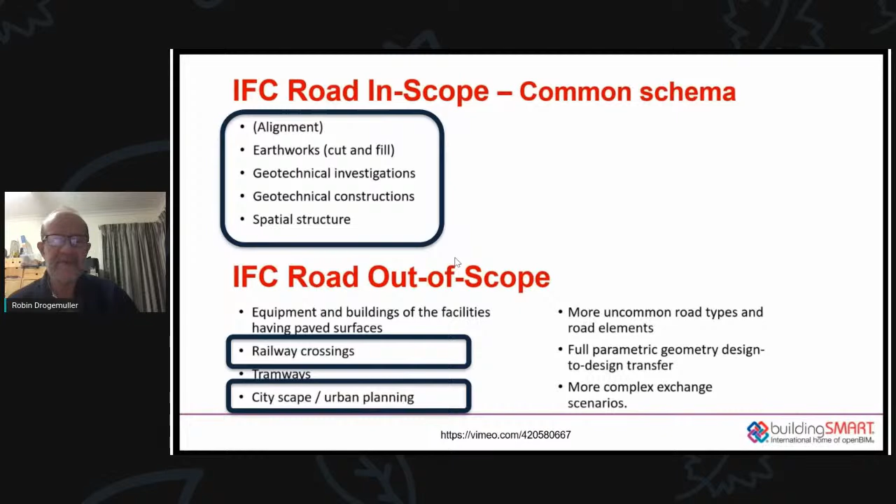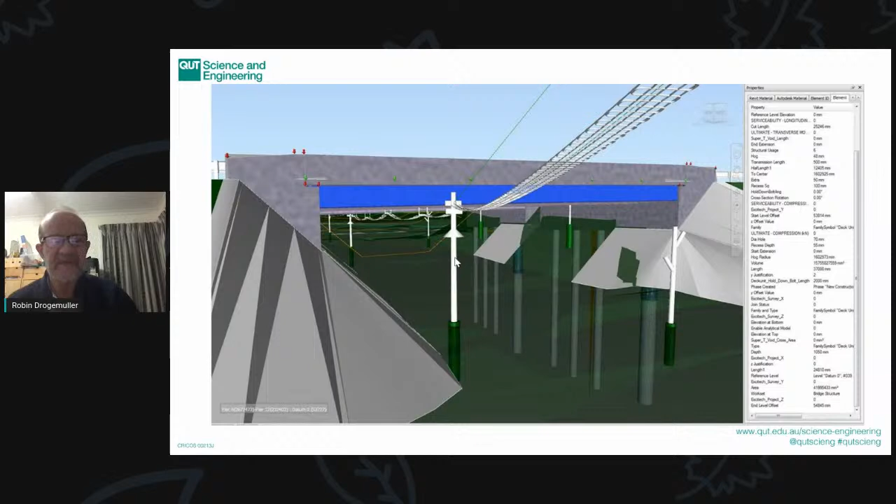So across all of these individual projects, next, they've done a lot of work defining the specific objects that are needed to service their particular area of interest. Next. And then from these, we need to pull out the shared objects and attributes that are needed to exchange data between the different projects. Next.

And we also need to look ahead and plan for other things such as electrical distribution. And obviously, if you're looking ahead for things that aren't yet defined, you're going to make mistakes or make decisions that aren't necessarily the optimal. So you need to make sure if you're going to make mistakes, you actually make them for good reasons. Next.

So for the interoperability layers, the type of objects we are going to be building. And next. There'll be some common objects such as fences and signage, which are used all the way through. So there'll be objects in the interoperability layer that can actually be used directly in CAD systems or BIM systems. Next. But there'll also be some abstract objects.

So if we look at the different types of bridges, a road bridge has a bitumen deck, a railway bridge may just have sleepers laid across with the rail, and the footbridge would have a pedestrian type surface. So there may end up an abstract object bridge, which is then instantiated in more detail in the domain layers above. Next.